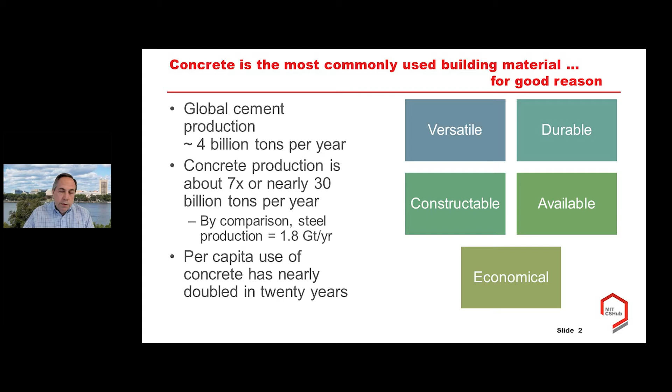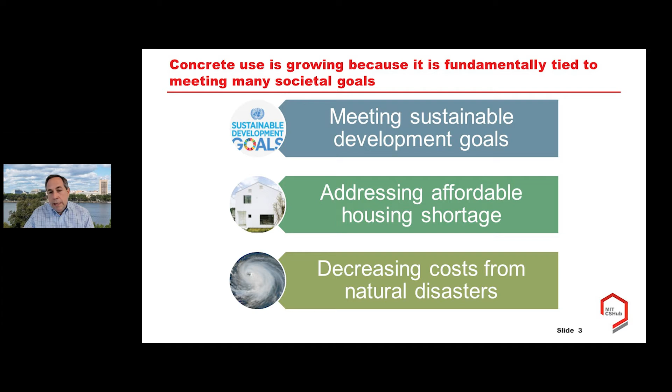There are also a number of forces at play that seem to be continuing the use of concrete, if not increasing the intensity of its use. And just to touch on a few of those that are key drivers for future use of cement and concrete are things like meeting sustainable development goals, or addressing affordable housing shortages, or decreasing the cost from natural disasters. It might not immediately be apparent as to why you would attach sustainable development to concrete, but the fact is that all of these types of goals require some level of investment in an effective and robust infrastructure. We can't deliver clean water, or we can't produce clean energy. We can't even deliver effective healthcare if we don't have a cost-effective infrastructure in place for those.

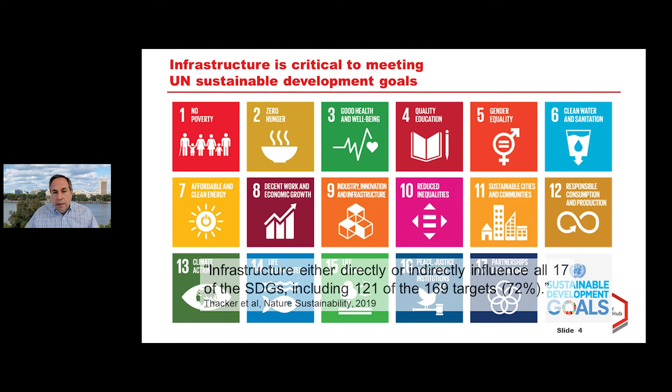In fact, analysis that was published in 2019 in Nature Sustainability found that infrastructure was tied to every one of the high-level 17 sustainable development goals put out by the UN, and in fact is tightly tied to over 70% of the specific targets and metrics to accomplish those goals. Now, we may often think of this as something that's more pertinent for the developing world, but all of us are aware of the ongoing policy discussions to spend anywhere from $1 to $2 trillion to upgrade our infrastructure, everything from bridges and roads to better hospitals.

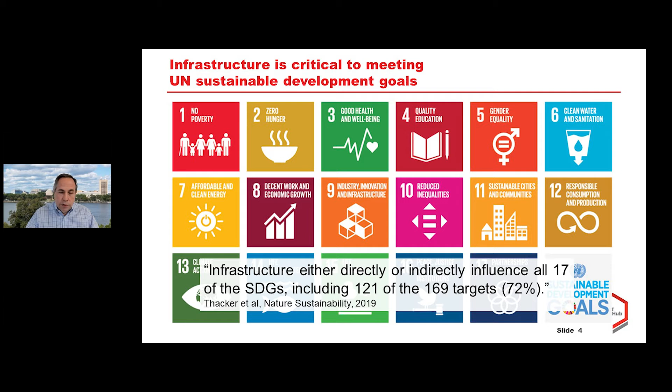So again, there are many materials that will play a role in providing that infrastructure, but given our current industry and our current construction industry, concrete will certainly be a part of that. Another aspect of that is addressing affordable housing shortages.

Freddie Mac estimates that if we continue the current rate of construction, we may be short as much as 4 million units by the end of the decade. And actually, I recently saw an estimate by the National Association of Realtors that suggests that may be an even larger gap. And so again, many materials will play a role, but currently part of the solution would be concrete to be able to meet this affordable housing shortage.

And then finally, a final pressure to think about that continues to push us to use concrete is in responding to what seems to be a somewhat permanent trend of increased instances of severe natural disasters. 2020 was the 6th year in a row where the United States experienced more than 10 events that caused at least $1 billion in damages.

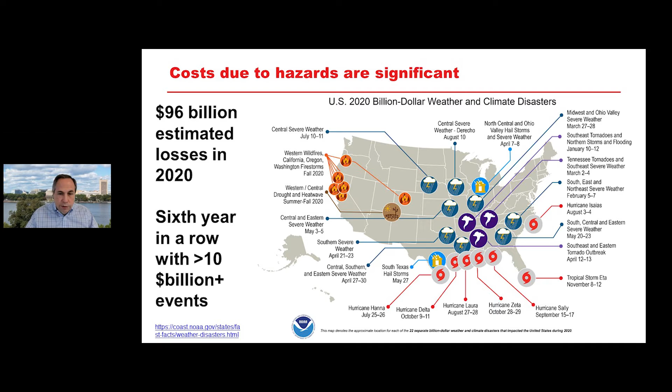And in fact, across the entire portfolio of natural disasters that occurred last year, the total amount of damages reached almost $100 billion. And spending simply to repair the damage after the fact is not the responsible strategy here. We need to shift to building more robust structures and more robust infrastructure so that we can reduce that cost and reduce the time to recovery. Again, many materials will play a role, but one of those materials will almost certainly be concrete.

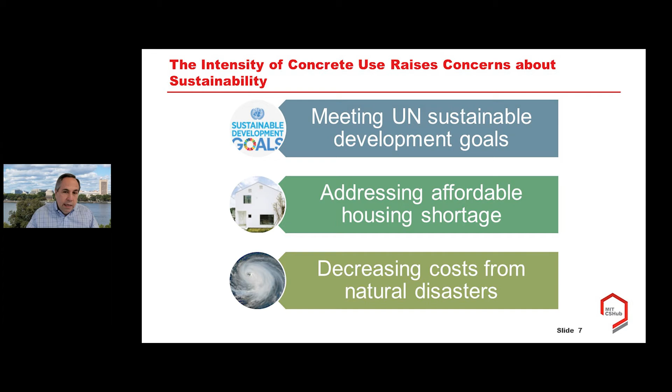So you see a number of trends that are continuing the use of concrete intensely out into the future. It's not surprising, therefore, that we see calls in both the popular press and even the trade press associated with architecture and construction that raise a question of how can we reconcile this intense use of this industry with the climate impacts that are associated with it. In fact, it sort of poses an existential question. Is it possible to continue to use concrete to meet development goals while also meeting sustainability goals?

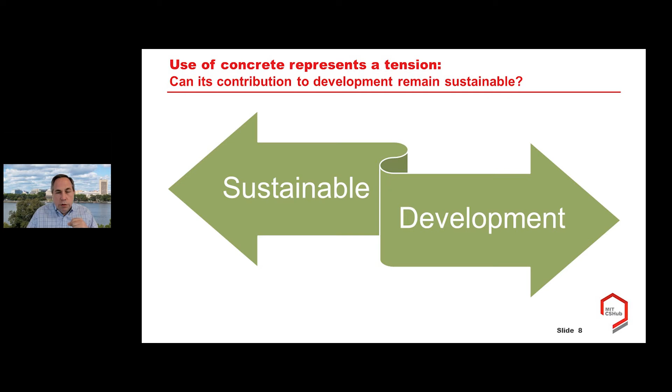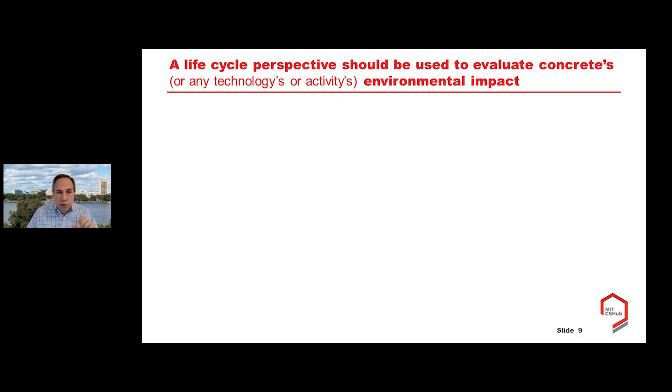And so what I wanted to share with you, as I mentioned, is some of our own research and research from others that have helped to try to identify what some of those pathways are and find areas where there is real possibility for concrete to contribute to sustainable solutions. I want to make a fairly critical point, and that is that when we talk about the sustainability performance of any material, concrete or any other material, we can't just focus on the material's production stages.

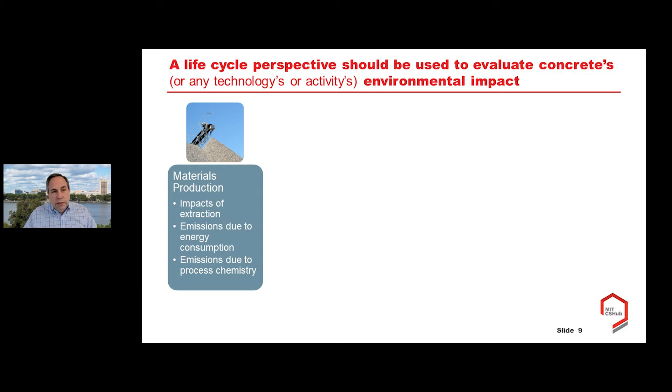Obviously, it is critical to understand what the impacts of extracting raw materials are, or emissions due to energy consumption or process chemistry. But materials choices affect environmental performance not only at that stage, but also many other activities of what we refer to as the life cycle of that material or of that product. The materials properties influence fuel use during processing. They influence the efficiency with which materials can be applied during design and construction.

Materials properties alter the properties of the products or the structures that they're incorporated into. They change the amount of energy that's used by that structure. Or they may be chemically active, or they may directly interact with the environment. And finally, materials choices that we make impact the end-of-life performance of a product. They impact how effectively those materials can be recollected and repurposed into a second valuable use.

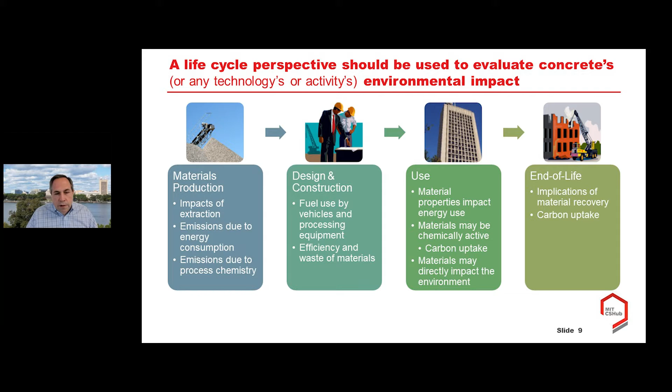Now, a lot of the focus of evaluating environmental performance for materials looks at just these first couple of stages. And you may have heard the term embodied impacts, and I will use that in the rest of the presentation as well. But my point here is that, again, when we talk about the environmental performance of materials, we have to think about the whole life.

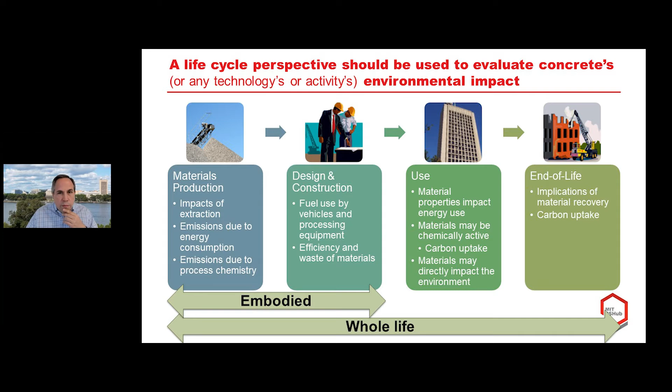Now, having said that, let's talk about what are some of the strategies, both in the embodied and the rest of the life cycle, to improve the footprint and ultimately make concrete a sustainable solution. And I'm going to break that down into three headings. First is one about how we can reduce the footprint of cement production.

Secondly, what are some of the opportunities to reduce the footprint during concrete production and its application? And then finally, the one that we are most excited about within the hub is how do we identify those applications that are net negative, where the use phase or end of life phase impacts actually provide benefits that are larger than whatever burdens occur during the embodied stages of the life cycle.

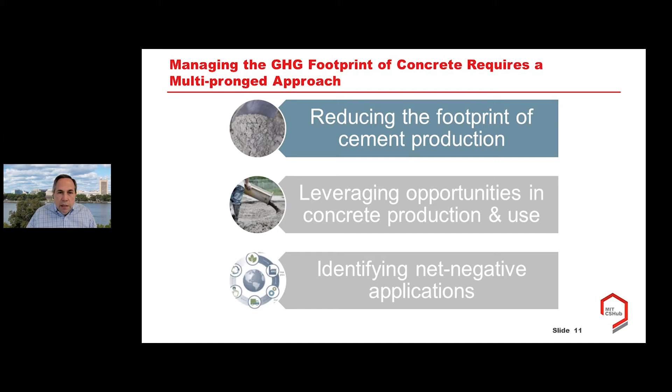But let's begin by talking a little bit about what some of the opportunities are for reducing the footprint of cement production. This is a schematic that comes from a report by the World Business Council for Sustainable Development, the International Energy Agency, and the Global Cement and Concrete Association. The process for making cement starts in this lower left-hand corner with the quarrying of raw materials, typically limestone. They're crushed and then fed into a furnace, a rotary kiln, where they are processed at over 1400 degrees C to produce a product that we refer to as clinker.

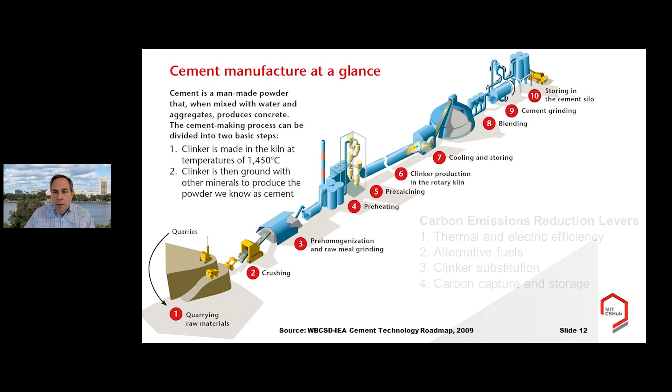That clinker is then subsequently crushed and blended with other minerals to make the powder that we refer to as cement. So this group of WBCSD, IEA, and GCCA have developed a roadmap of what some of the strategies are to reduce the footprint of cement manufacture. And in particular, they have identified 4 points of leverage. That is, improving thermal and electrical efficiency within the facility, basically bringing it up to best-in-class performance.

Applying alternative fuels, that is, fuels that are often bio-derived, but in one way or another don't generate the same fossil carbon output as conventional fuels. Strategies to blend in other types of minerals and therefore reduce the amount of clinker that is required to produce the cement. And finally, implementing carbon capture and storage technologies. So these are technologies you might have heard about for power plants or other large industries like steel production that can be applied also in cement production in order to capture and sequester carbon before it's released.

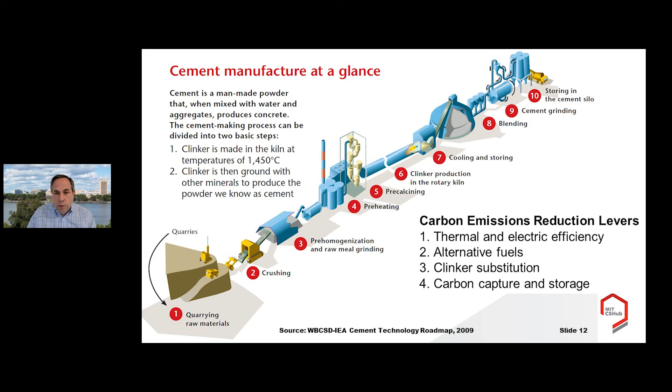So what has this group found as some of the possibilities for these strategies and which ones would be most influential? Overall, this group has developed a roadmap of some very realistic implementations of these types of technologies that they feel could reduce overall cement production emissions by 24% by 2050. And that 24% is an impressive target because what they mean is 24% lower than roughly current levels of emissions, despite the fact that they anticipate the industry to grow its production by about 20% over that same time horizon.

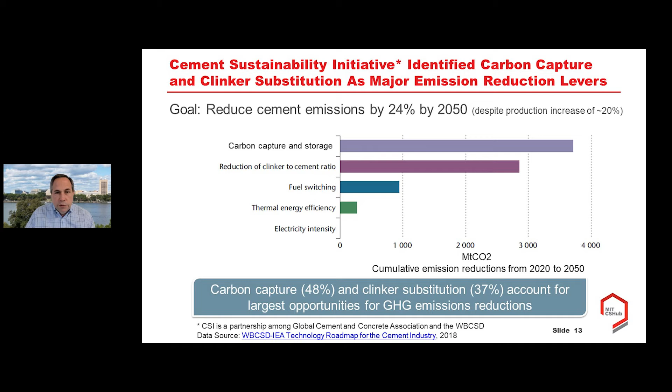Now, even though these others are smaller, they are also an important part of the portfolio. It's important that technologies are put in place that allow for alternative fuels to be used and for the facilities to be brought up to best-in-class technology. So overall, there is some real important potential here for significant reduction. Think about the next of those stages of production, and that is the production of concrete.

So in order to understand what is in these 5 here: different types of aggregates, binder, which is classically Portland cement as produced in the way I described earlier, but can be other cementitious materials as well, water, and then what are referred to as admixtures or specialty chemicals that provide specific properties either during construction or use. Now, these mixtures have generally been designed to provide typical technical performance metrics. So that is strength or stiffness or some form of constructability or durability.

What we think is exciting is that because it hasn't really been managed previously, there should be large opportunities to design these mixtures to continue to provide those structural performance metrics, while also reducing GHG emissions. So what are some of the ways we can do that? Well, first, just to help contextualize that a little bit, it's useful to understand where the big drivers of CO2 emissions associated with concrete are.

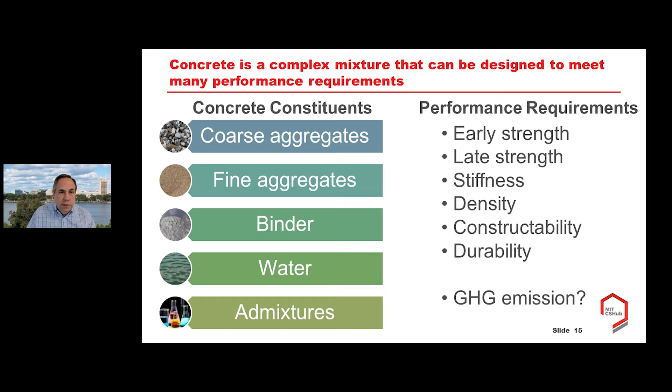And I found that a really good way to bring that message home is first by comparing it to where the mass in that mixture lies. By mass, the mixture is dominated by aggregates, but the emissions, as you can see, it's almost flipped and is dominated by cement production.

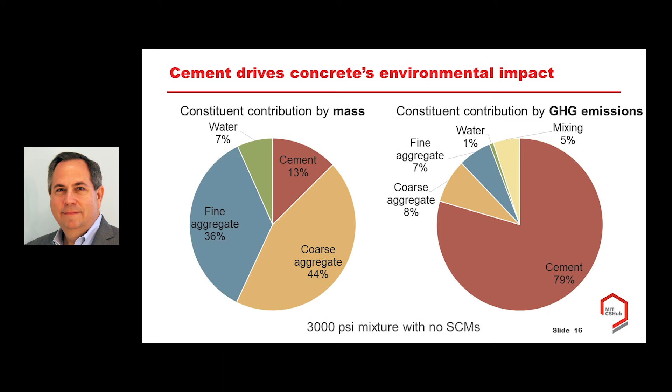You have another 5% associated with the mixing or the processing and transportation of materials, and about another 16% or so that comes from the sourcing of other raw materials like aggregates. So given this picture, what are some of the opportunities to further reduce the footprint of concrete?

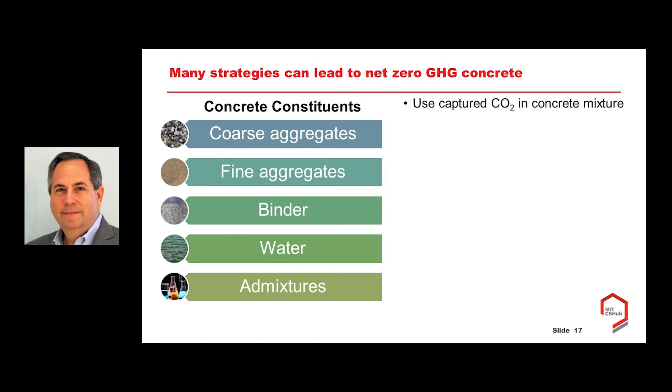Well, one of them actually comes from a fairly surprising source, and that is that it is possible, and this is actually commercially implemented today, to inject CO2 during the mixing process, and in doing so, bind up some amount of CO2 in the concrete mixture.

Some other strategies have to do more directly with some of the constituents, in terms of aggregates. One is to carefully source and process aggregates to maximize the packing density of those and therefore minimize the amount of binder. So remember, the binder was a strong source of CO2. Another one that we are particularly excited about is the development of technology to produce synthetic limestone aggregates from captured carbon.

Given that the conventional Portland cement is a potentially significant source of CO2, there are strategies to reduce the amount of that; we refer to these as the blended cements that make use of other raw materials. Any cement produced with, say, carbon capture will lower its general footprint, or using so-called supplementary cementitious materials to reduce the amount of cement that is being used as a binder. And finally, there is an important role for admixtures to enable many of these strategies and still be able to generate the properties during construction or use.

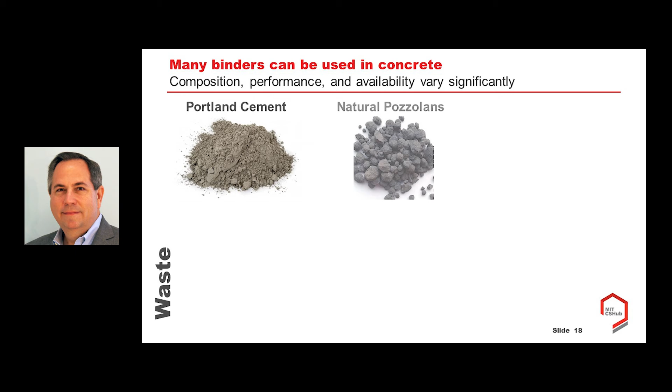A very important one is the use of other binders in addition to Portland cement. These may come from natural sources, such as natural pozzolans or calcined clays, or they may come from waste sources, such as fly ash or granulated slag, or even properly processed post-consumer glass. All of these can serve a role to reduce the amount of clinker that needs to be produced and therefore the emissions that are associated with it.

Now, it probably raises the question, if these are out there, why do we not see more of their application today? And I should say that they are applied widely today, but there is opportunity to increase that use. I would highlight two key challenges here. One is about standards: one of the key barriers is often the way that standards or codes are written that prescribe a certain amount of Portland cement that has to go in the mixture. That obviously immediately puts a limit.

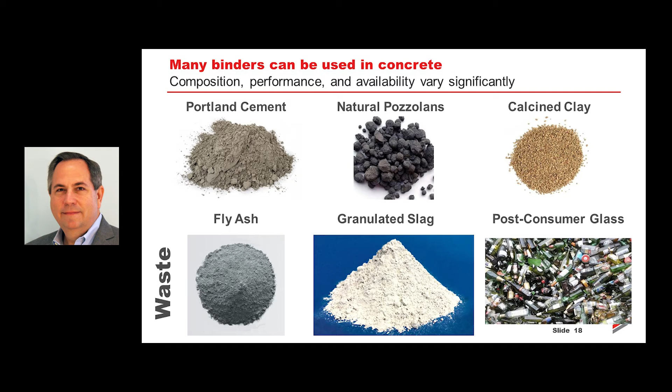The second one is often perceived risk. Because the supply chains for these materials may not be as well developed, or at least as well tailored to the construction market as Portland cement, firms may often perceive there to be additional risk in incorporating them into their portfolio. So to de-risk this situation, we feel that an important thing is the development of additional information so that firms know what is available when and where in order to reduce that sourcing risk.

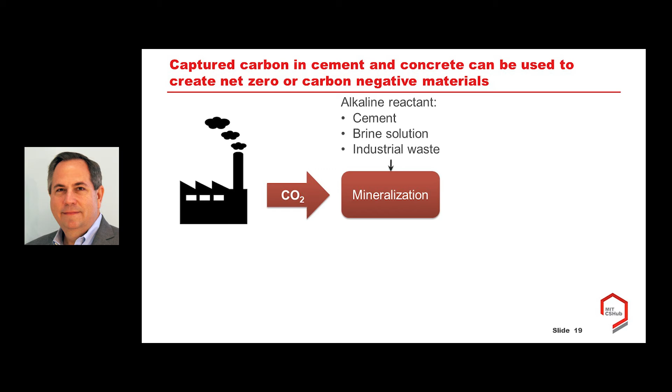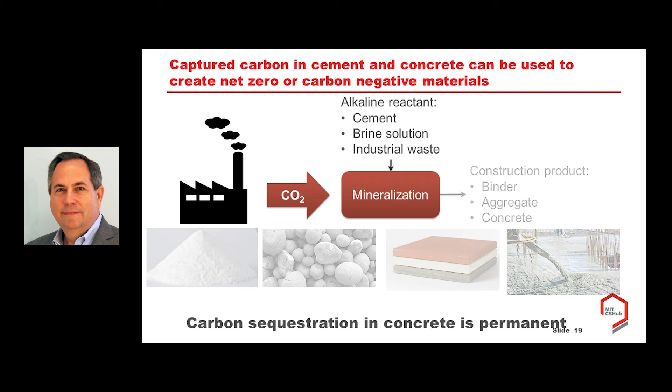Another strategy that I mentioned that we are particularly excited about is the use of captured carbon in cement and concrete production. I mentioned CO2 injection during concrete production, but what I'm talking about here more generally is the combination of CO2 with some kind of alkaline reactant. It could be a seed amount of cement, a brine solution, or some forms of industrial waste that mineralize when combined. That is, they bind the CO2 in order to produce some type of construction product.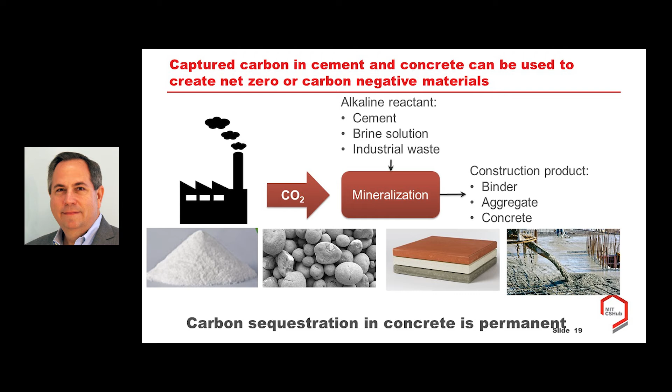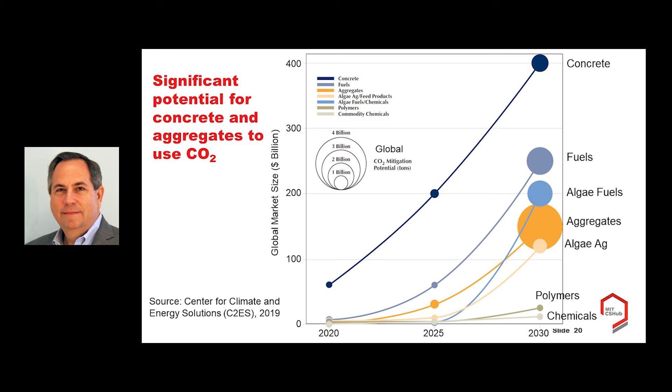Now, I just want to reiterate this point that I made earlier, and that is that one of the biggest barriers to seeing more application of these innovative mixtures and these innovative technologies is the use of prescriptive standards. And so we think it's really critical that the industry move toward performance-based specifications. That is, specifications where the composition of the mixture is not specified, but rather the performance that it would deliver.

We think that if specifications are developed in that way, it will increase the amount of potential innovation here. It'll allow producers and users, that's architects or construction firms, to make the trade-offs between performance, environmental impact, and cost. So a really critical barrier that needs to be removed to drive this type of innovation.

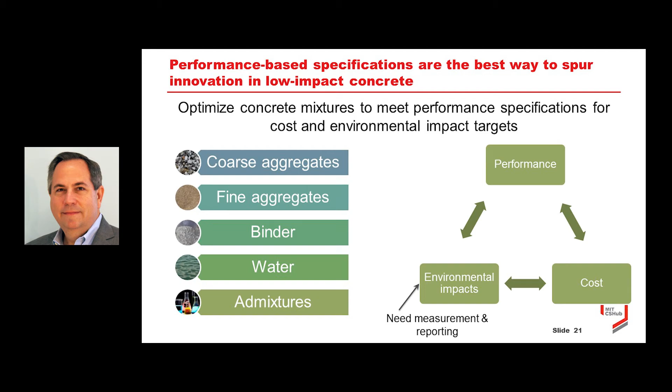Now let's turn to the last category. So we have some opportunities to reduce the footprint of cement production. We have some opportunities to reduce the footprint through concrete production. What about the possibility of concrete to provide carbon reduction benefits during use and end of life?

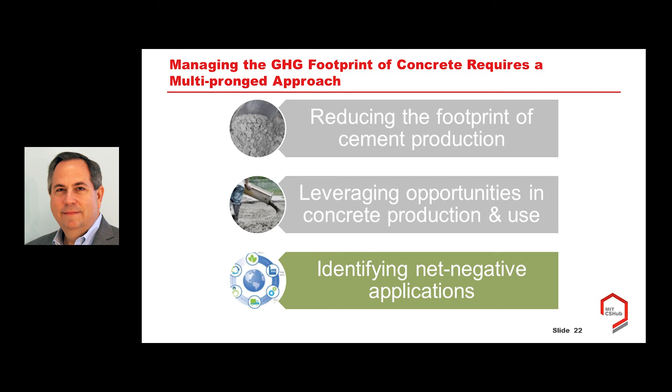So I just want to reiterate what I mean by this, that the material that is chosen at the beginning of life can have real implications, real impacts on the emissions that are associated with these later stages of the life cycle, real impacts during design and construction, real impacts during the use of the product or structure, and ultimately real impacts on end of life.

Now, this is actually the largest portfolio of our work, understanding how those material choices impact these parts of the life cycle. And so there are a number of different examples I could share with you. I thought that the most fascinating one is actually about pavements. And so I want to initially acknowledge that that's probably a sentence that you never thought anyone would say, that the material choice in pavements is a fascinating topic.

But I think that the reason that it is in fact quite fascinating is because of that irony, that we often think that the materials that go into pavements, certainly they have some impact in their production, but once they're in the road, they're there. They simply sit there. What could their impact be during that so-called use phase of the road? But it turns out that we and others have uncovered a number of ways in which that seemingly passive material has some significant ways in which it impacts the environment.

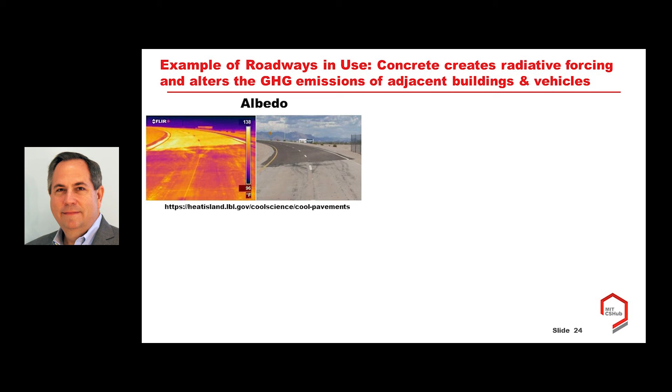So one way that materials impact the environment is through their surface and thermal properties. So the one that I'm emphasizing in this figure here is so-called albedo. That is the amount of energy that a material reflects back into the environment or absorbs as heat into itself. You can see this IR image on the left showing how different the amount of heat is that's associated with two different pavements, a darker one in the background and a lighter one in the foreground.

Another way that pavement materials interact with their environment during life, for concrete, is so-called carbon uptake or carbonation, and that is the absorption of CO2 during the life cycle. And a final one is one that I often have found that very few people think about, and that is that the material properties of the pavement actually impact the amount of fuel that the vehicles that drive upon that pavement use. It's what we refer to as pavement vehicle interaction.

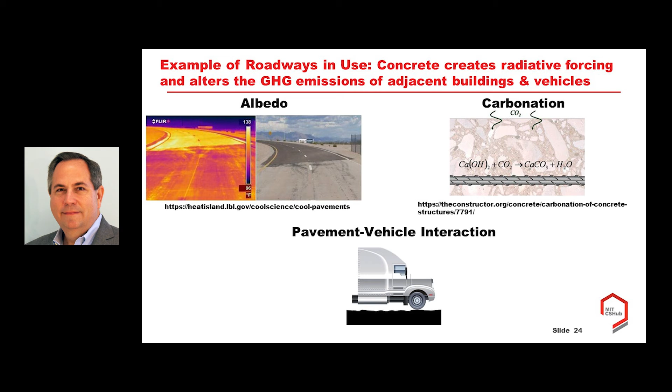So I'd like to unpack a few of these to give you a sense of how our research has provided some quantification of what these impacts can be. So let's talk about carbon uptake, or what's historically been referred to as carbonation. This is a natural process that happens when CO2 reacts with hydrated cement in the concrete. It is effectively the same type of process I was referring to earlier that would create those synthetic aggregates. In that case, we would use chemistry in order to accelerate the process.

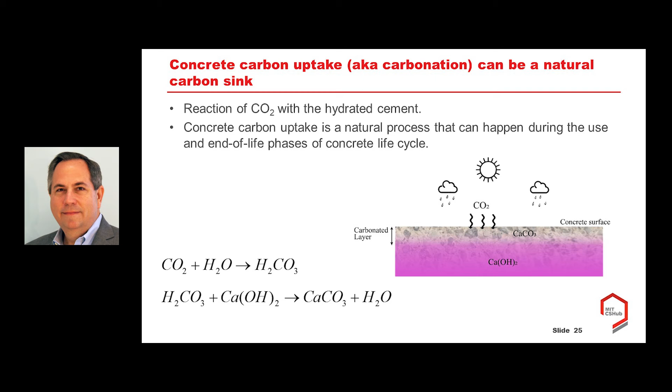Here we're talking about a comparatively slow but natural process that happens throughout the life cycle of the concrete structure. So to understand the overall implications of this mechanism, we have built a set of models to try to understand how different decisions about materials and pavements can change the total amount of carbon uptake that would occur over time.

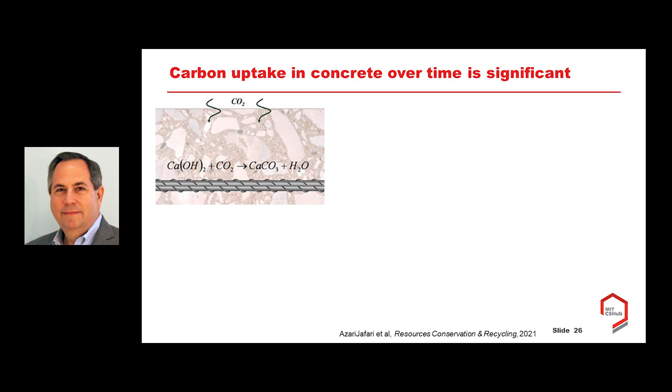So there are a number of different factors that can influence that, but a couple of the critical ones are the amount of exposed surface area. Obviously, if there's more surface area, there's more opportunity for CO2 to diffuse in and be turned into carbonates. That, when we talk about pavements, translates fairly directly into what kinds of maintenance treatments happen to that pavement. So a common way that concrete pavements are maintained is to actually grind off some of the surface to re-smooth the pavement. That grinding off obviously exposes fresh surface area and reinvigorates the process.

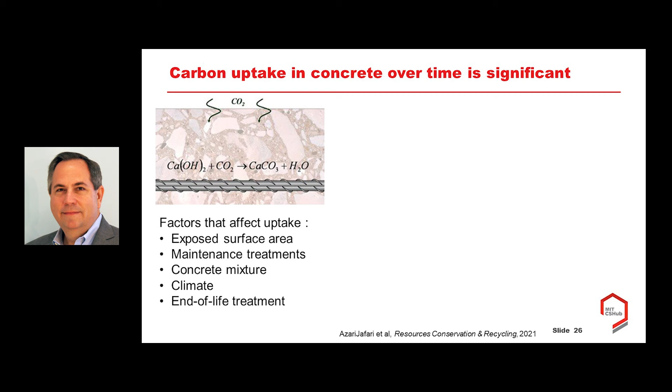And finally, I'd just touch on one there at the end, which is the end of life treatment. This is again a surface area question. When we either tear up a pavement or we tear down a structure, that crushed concrete that results obviously creates many new exposed surfaces. And as a consequence, the rate of uptake at end of life can be much faster than it is during the use phase of a built structure or pavement.

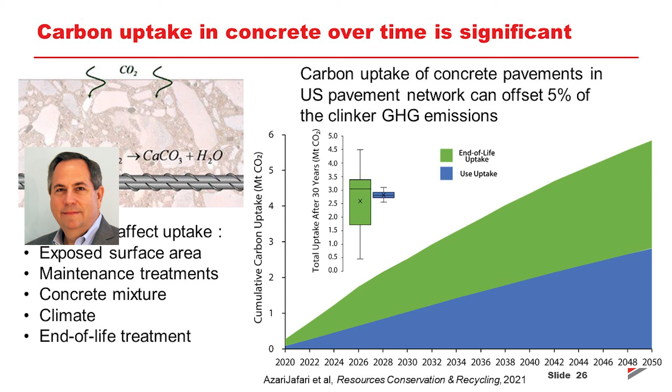So we've taken those detailed models and we've simulated what the implications would be for concrete pavements in the US pavement network. This is a simulation out over 30 years. The blue represents the amount of carbon uptake that would occur during the use phase of the pavement, and the green represents the potential uptake that can occur at end of life. You can see our estimate is that carbon uptake in this case could offset about 5% of the clinker-related GHG emissions associated with that pavement. So that's a significant savings, and it's something that certainly should be managed for these types of structures.

Let me just briefly touch on these other two mechanisms and how we've modeled those and what their implications would be. So first, this pavement vehicle effect. Pavement vehicle interaction occurs for two reasons, either because of the stiffness of the pavement, so a less stiff pavement flexes and vehicles have to expend energy to overcome that flexure. It also occurs because of the roughness of the pavement. The rougher a pavement is, the more that I spend energy moving wheels up and down rather than forward. It turns out that different pavement materials have different amounts of stiffness and they degrade in terms of their roughness at different rates.

Similarly, different pavement materials have different amounts of this so-called albedo effect. There are actually 2, 3, depending on how we count it, ways in which the albedo effect is climate relevant. One is this first very acute angle, and that is the amount of energy that comes in from the sun that is basically directly reflected right back out of the Earth's atmosphere. So that avoids general warming. It's what we would call radiative forcing effect.

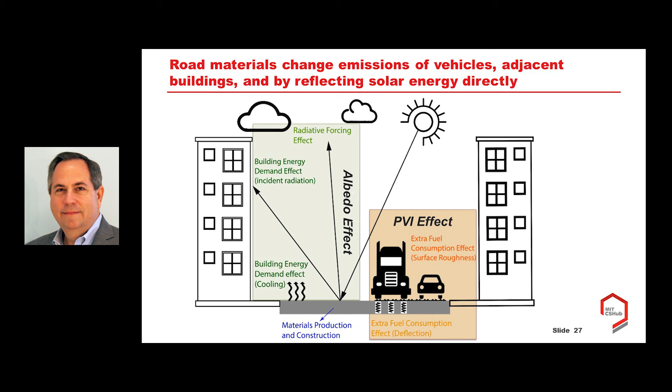The other is that those reflective and thermal properties of the pavement alter the temperature around the pavement and alter the amount of radiation that hits adjacent buildings. And so that also changes the amount of energy that those buildings use, and therefore the CO2 that is associated with producing that energy. So we've actually built simulation models that allow us to capture this effect.

Now, I would just make one other point about this, simply because of the way that research progresses: despite the fact that I talked to you for quite a while about all the strategies that are out there for reducing the footprint of cement and concrete, this benefit actually would accrue even with current mixes that have not been optimized to reduce GHG emissions. So again, a really exciting area where concrete can be a part of a sustainability solution.

So we had these interesting results about the potential for carbonation, the potential for albedo, the potential for pavement vehicle interaction, and we had these different strategies that various groups have proposed for reducing the footprint of cement and concrete. And so we asked the question, well, what would be the implication of those? And we did that by combining the simulation models that we have for the US pavement and building infrastructure with these types of scenarios of implementing these reduction strategies.

So we actually looked at 3 scenarios. One we call 2017 level, which is essentially if we continue to produce cement and concrete as we have historically. One that we called projected implementation, where we implemented only the types of strategies that have already been identified by various industry groups or committed to by those groups. And then finally, one that we refer to as carbon neutral implementation, which applies those same strategies more aggressively, as well as the other types of strategies I mentioned earlier.

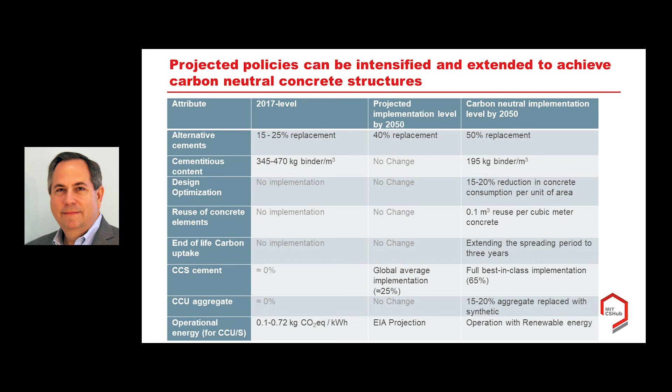So incorporating recycled concrete, being more efficient in its application during design, implementing best-in-class carbon capture and storage in the industry, and also some amount, only about 15 to 20% replacement of aggregate with those synthetic aggregates. And so we looked at these to understand, well, what is the real potential here for cement and concrete?

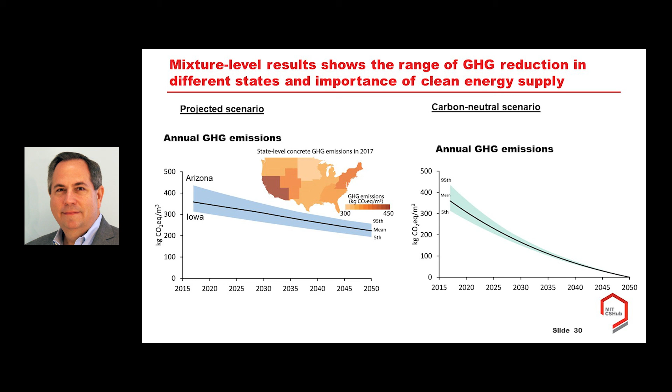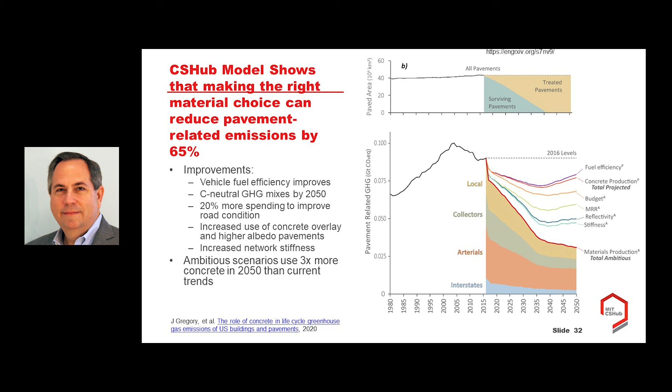So just in conclusion here, I want to make one quick point and then highlight some of the key strategies. One is that it's critical when we talk about the performance of a material that we talk about it from a life cycle perspective, that the impacts are not just in the materials production, but can also occur from fairly surprising places during the use phase. So it's critical that we take a whole life perspective, not just looking at embodied emissions.

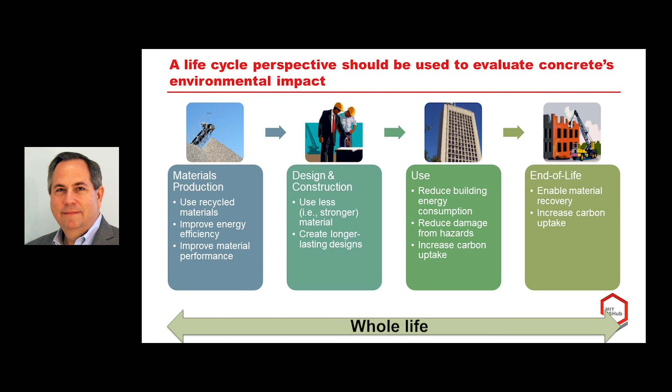In terms of the cement and concrete system, there are many opportunities out there to reduce the footprint and to ultimately become part of the sustainability solution. It's clear the industry's got to do the hard work of installing best-in-class technologies. They've got to make the investment and partner with others to mature and implement carbon capture and storage technologies. In terms of concrete, it's critical that we shift to performance-based standards to allow for innovation and therefore adoption of things like synthetic aggregates as well as low GHG mixtures.

And when we talk about the life cycle as a whole, there are some really clear opportunities to have net negative applications of concrete, including stiff, smooth, and reflective pavements, energy efficient and resilient buildings, and structures that have been managed to maximize carbon uptake during use.